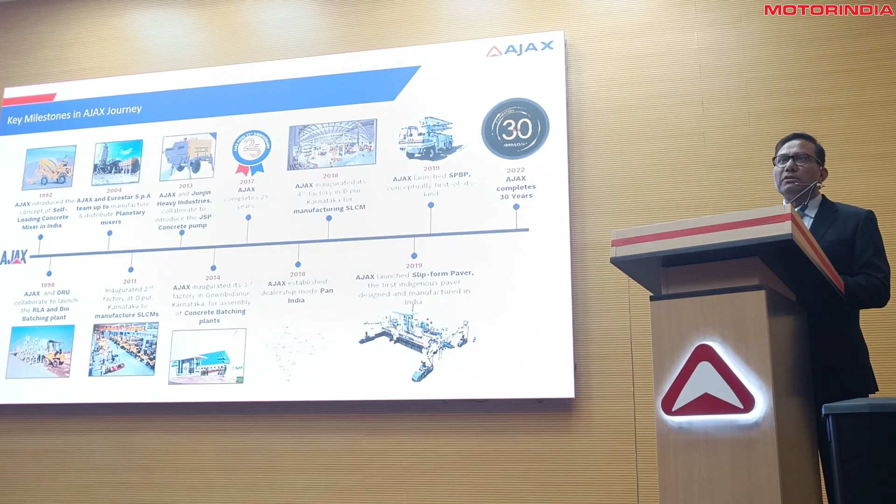Many of you may have known AJAX Engineering, but for those who don't, AJAX Engineering was started in the year 1992, and since then it's been 3 decades and more for us in this business. Over this period, we've become a comprehensive 360-degree concrete equipment company, which provides not just products but solutions to the construction industry.

We've reached this position through a journey that is deeply rooted in product development, design and engineering, innovation, quality and reliability of our products, and the strength of our distribution channel, which ensures that customers get the product wherever and whenever they need it, including the after-sales support that is so key to the success in this business.

Friends, we have played a very pivotal role in establishing ourselves at the forefront of developing infrastructure in India.

We often hear 'make in India.' But having said that, where will an Indian company go? It is obviously going to make in India. But little pun on the make in India, we have been making India for the last 30 plus years.

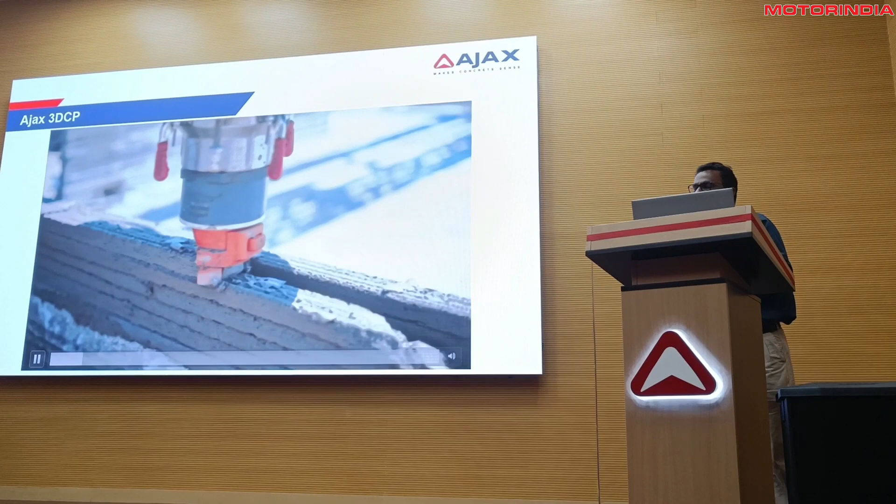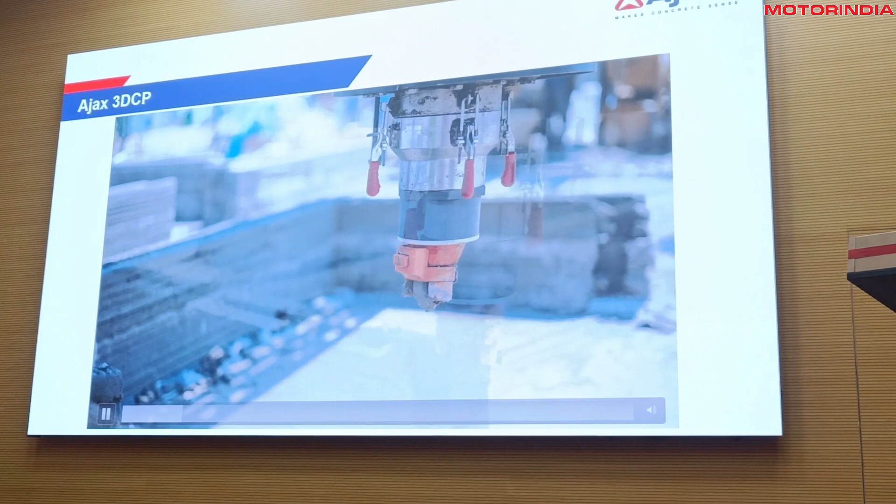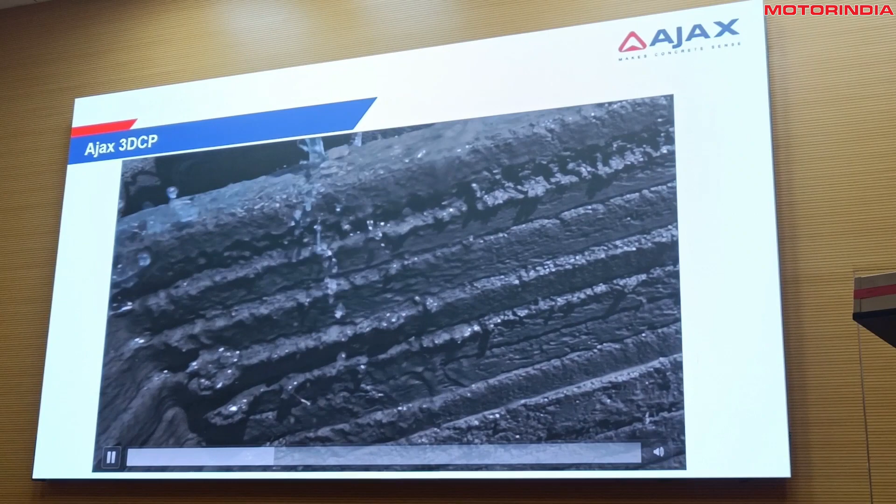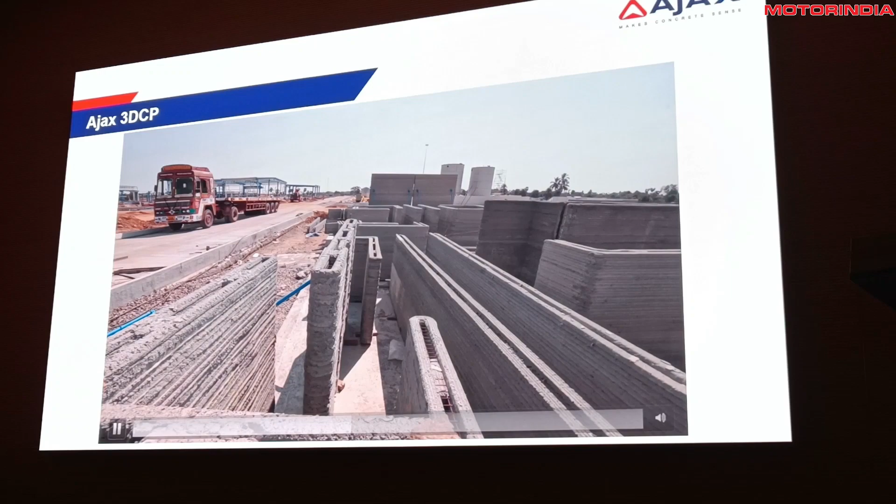First at the Chennai site, this was the first site. The machine was built and then immediately it was transported to that site, and we have done a great marvelous job there. So you can see that. Which are built so that a very big size building can be done. You can see the reinforcements. Some of the parts are 9 meters in length and 3 meters in height.

This one is the BRO site.

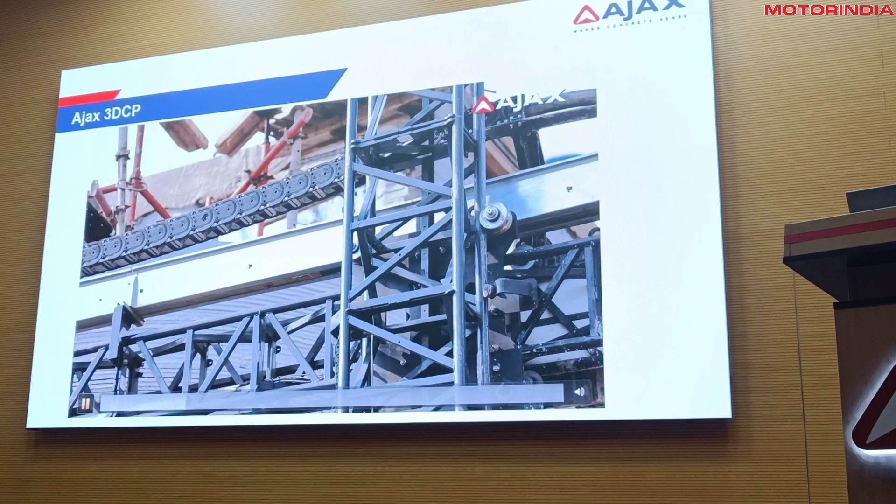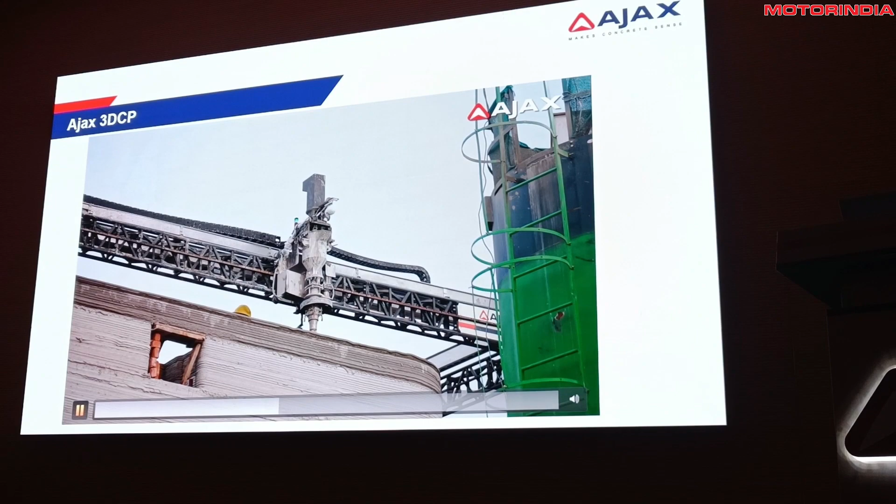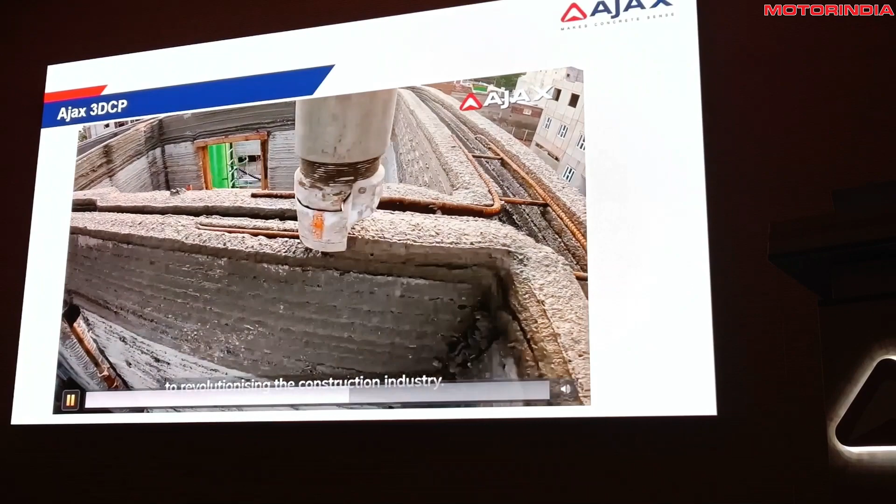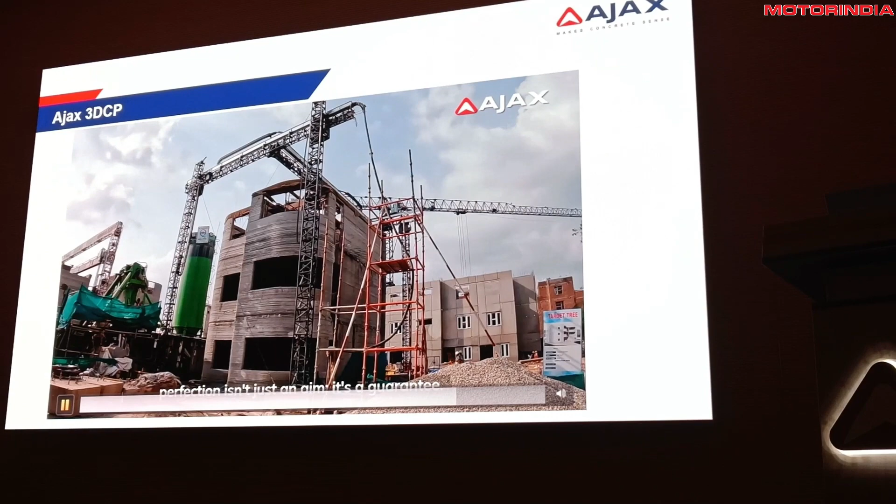In a world where innovation drives progress, AJAX stands at the forefront, reshaping the way we build. Crafting the impossible from the ground up with unparalleled precision. Meet the future, AJAX 3D construction printer. Crafting diverse structures layer by layer. Turning digital designs into tangible masterpieces. At AJAX, we've always been at the forefront of innovation. The 3D construction printer is a testament to our commitment to revolutionizing the construction industry. It's not just about building faster, but smarter, more sustainably, and with unparalleled precision. Every layer printed is a step towards a more efficient construction future. With the AJAX 3D construction printer, perfection isn't just an aim, it's a guarantee. AJAX 3D construction printer, building tomorrow today.

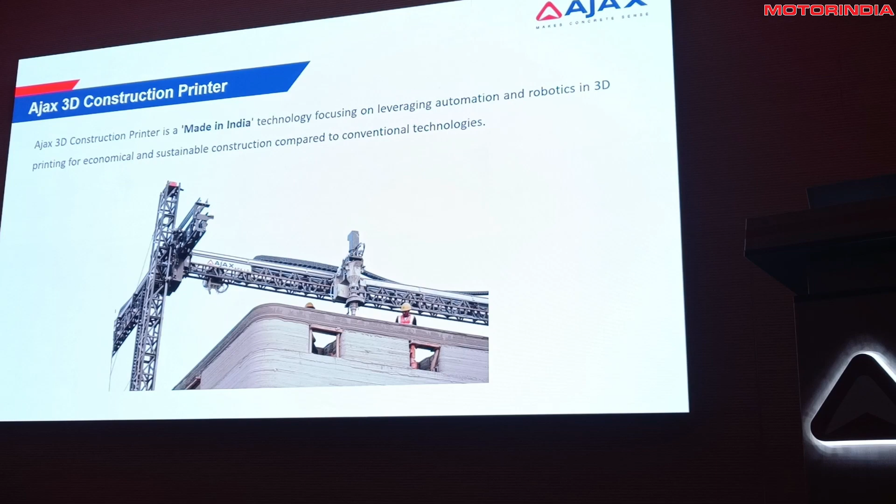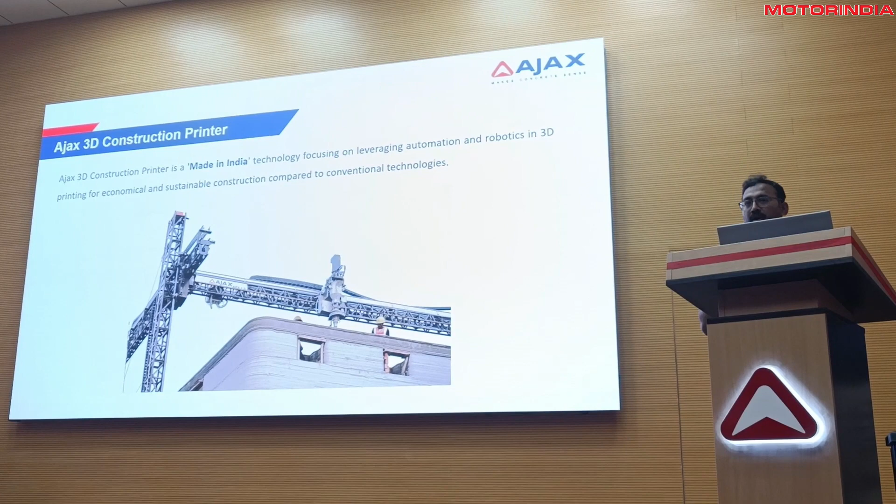So my colleague Kishore and me, both of us, will try to talk about our printer. Yeah Kishore, come. So this construction printer is made in India, meaning it's completely designed here, manufactured, and assembled. So everything has been done totally in India.

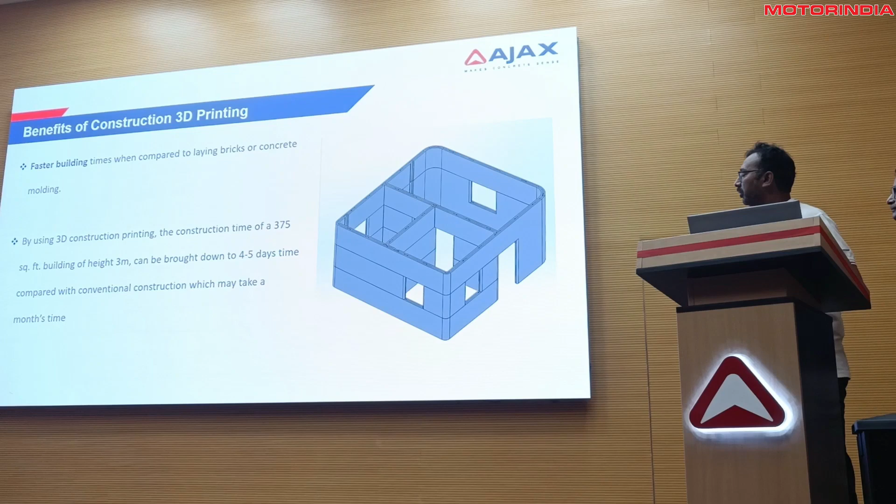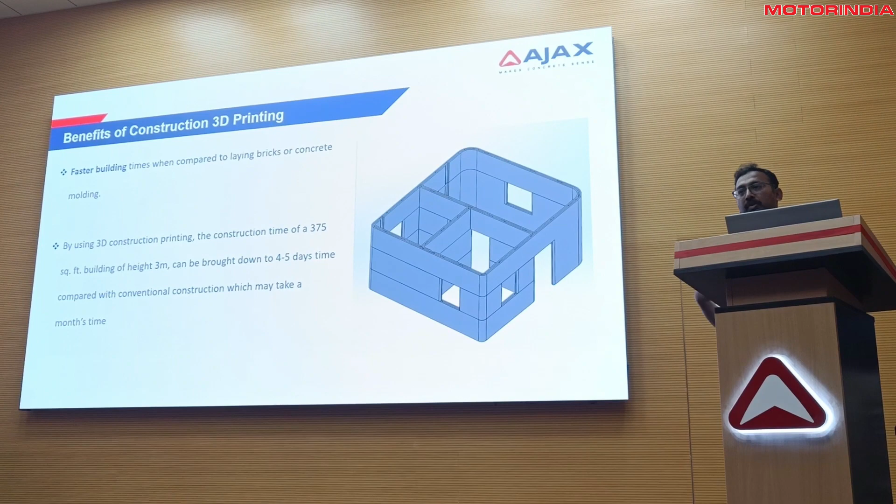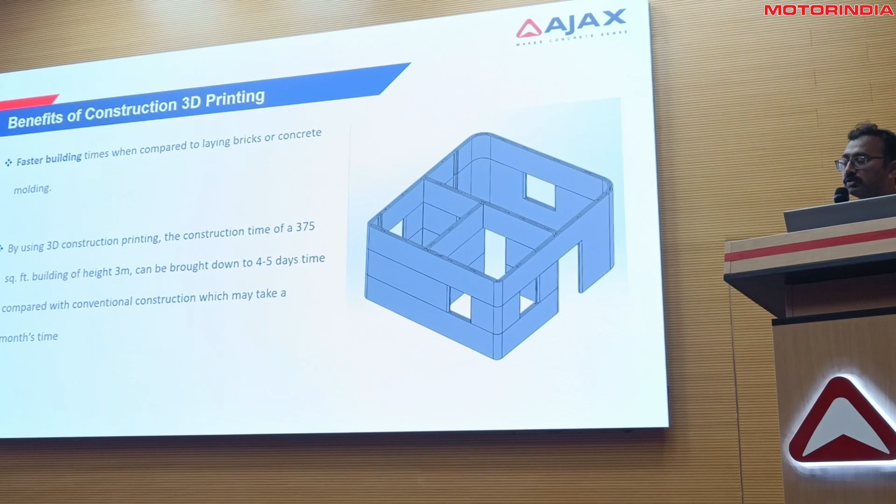So what are the benefits of construction 3D printing? We can build faster when compared with laying of bricks or any concrete molding or Mivan technology. So the rate of building is very faster, and you can, for example, build a 3-meter height building in 4-5 days. So for example, if you consider a 375 square foot building of height 3 meters, it can generally be completed in 4 to 5 days. When you take conventional construction, it takes around a month's time for completely building a 3-meter high building.

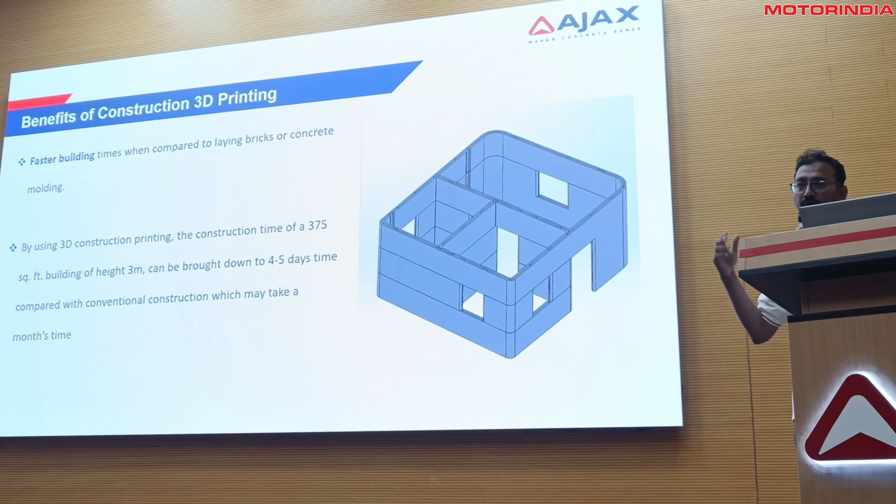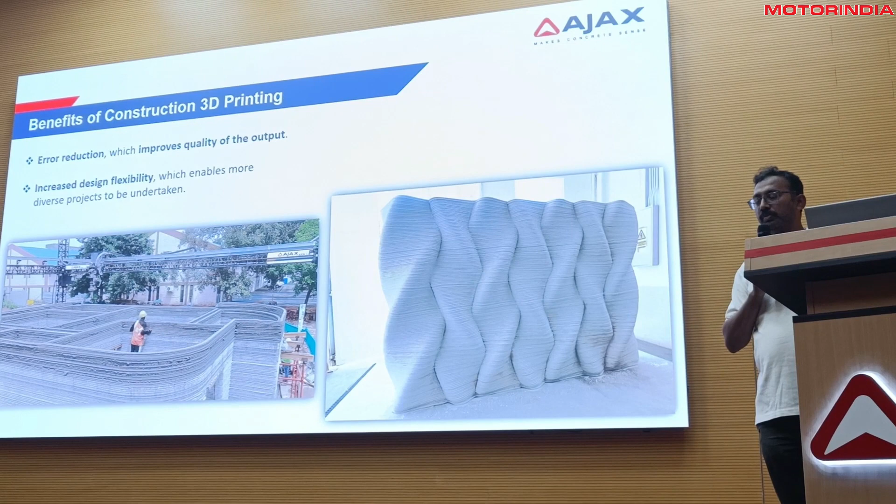And in this case, error reduction is very high because it's a completely programmed path. Once it's fed into the system, it simply has to repeat the path and it will be laying the layers. So the rate of error is very less and it improves the quality of the output.

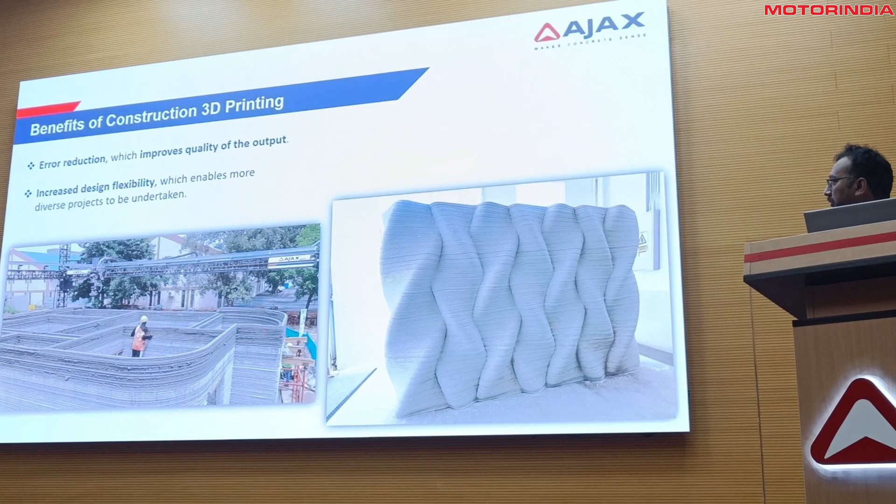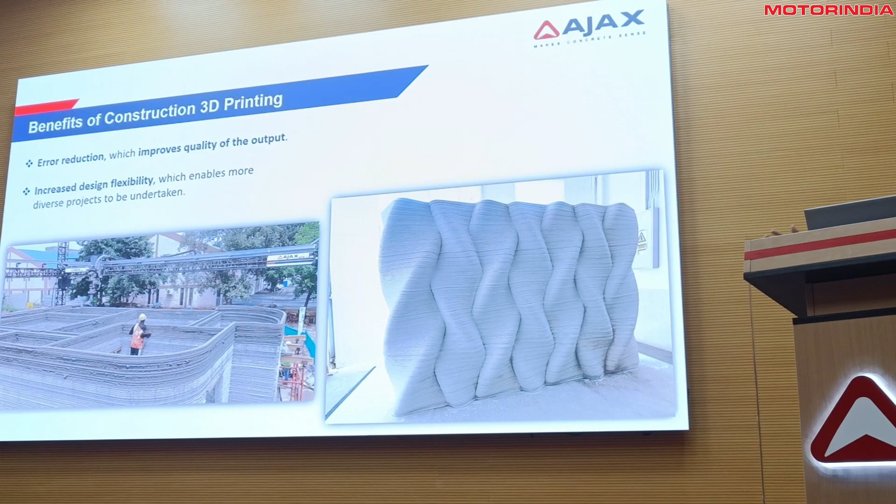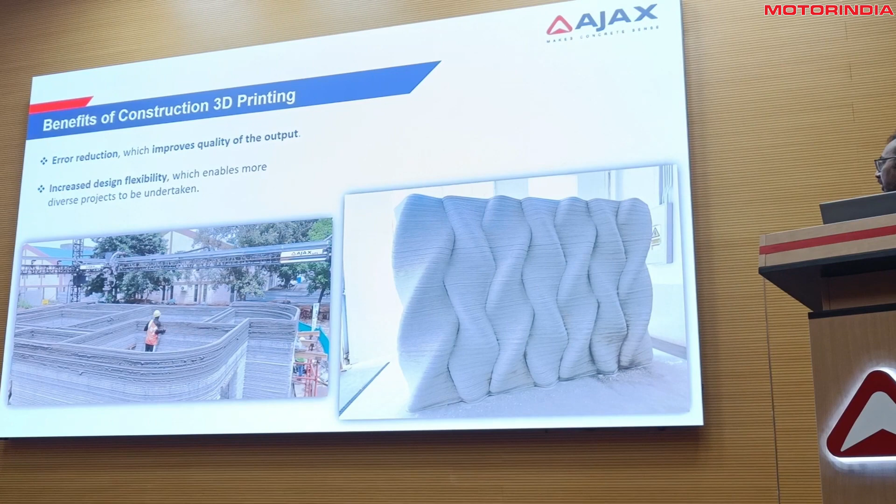And the next important point is that it has increased design flexibility. So in the bottom picture, you can see the curves. We can add curves or any shapes or any complex things which can be printed. This is also an example of how complex structures can be printed. So if you have increased design flexibility, then we can work on more diverse projects with very complex shapes, which would not be possible in conventional construction.

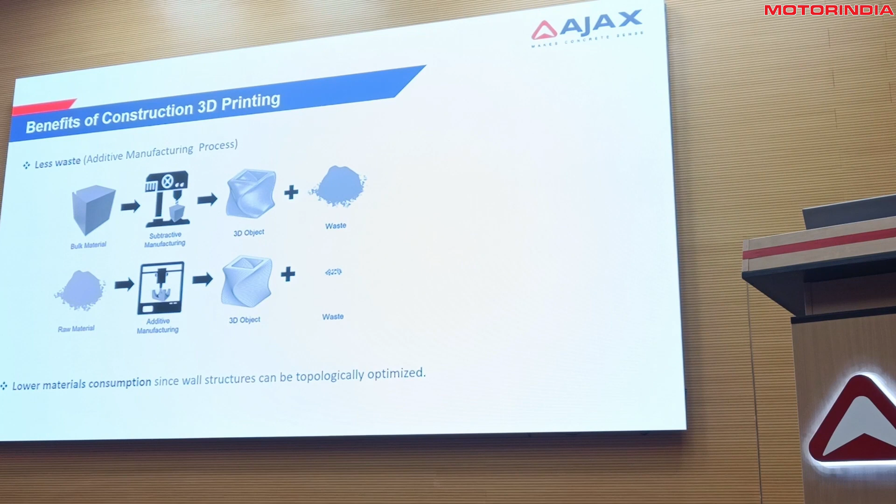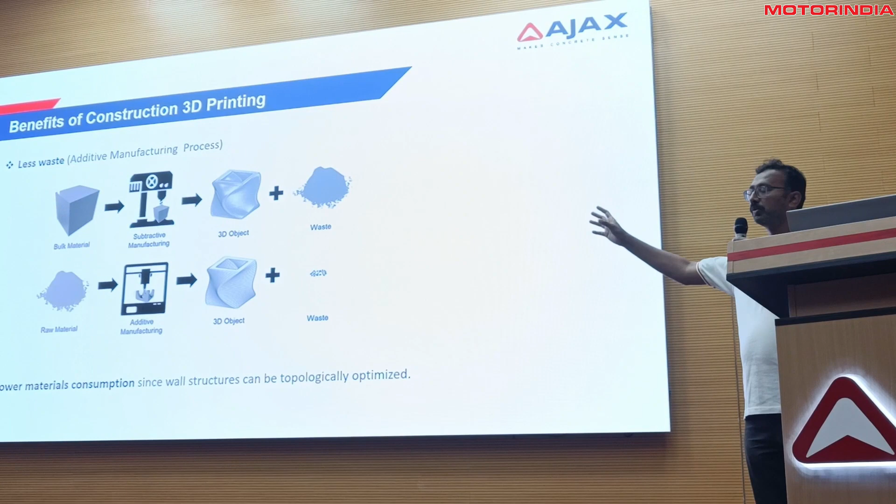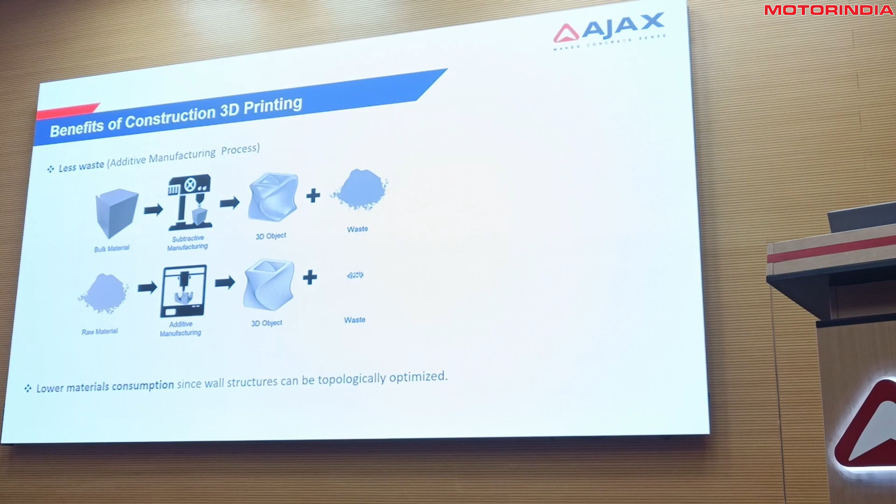Another important feature is less wastage. Why is there less wastage? Because if you take any regular construction, for example, in this picture you can see a solid. So for converting the solid into the required state, we have to remove a lot of material, so there will be a lot of wastage. In case of this construction printing, what happens is that we take the raw material and we form it to the required shape, so there is very little wastage of material.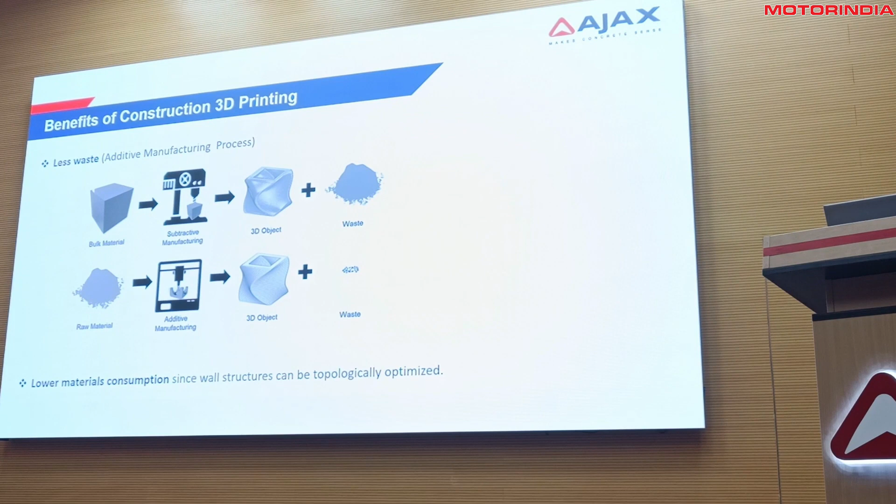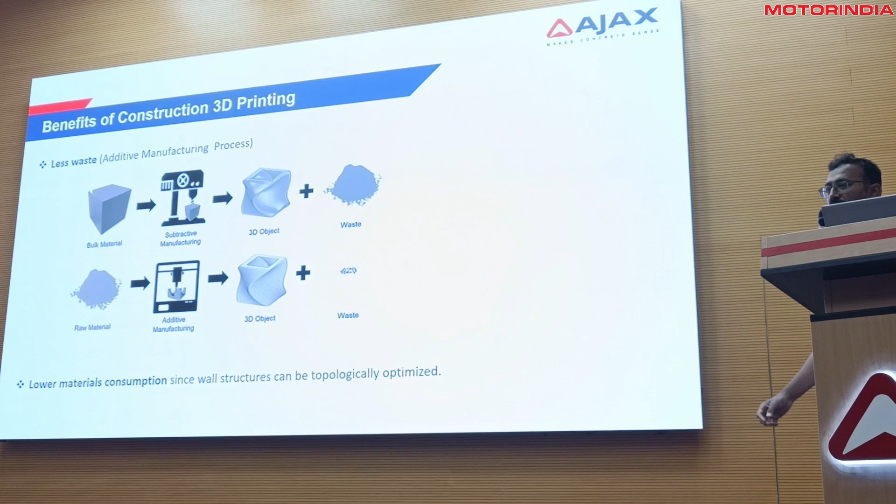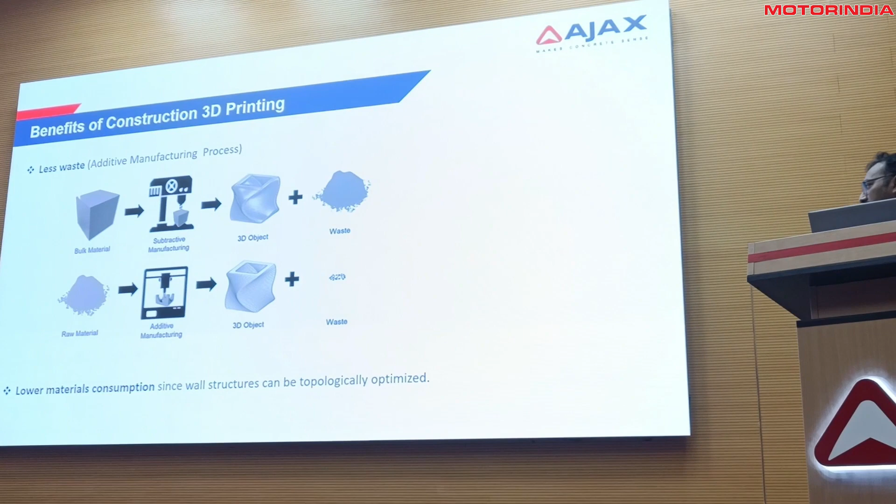Another benefit is low material consumption, since wall structures can be optimized. For example, as per the design structure, if a required thickness is needed that cannot be achieved with conventional brickwork, that is possible in 3D printing, where you can form it as per the required strength. There is complete flexibility, which results in lower material consumption.

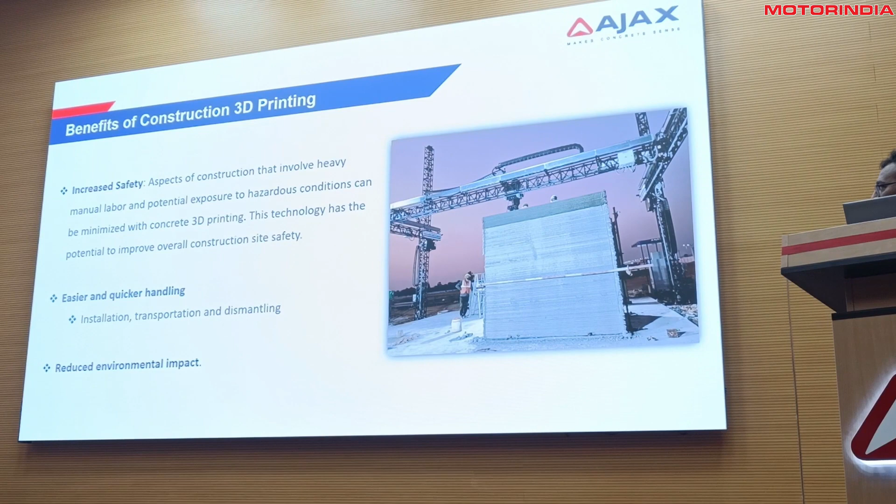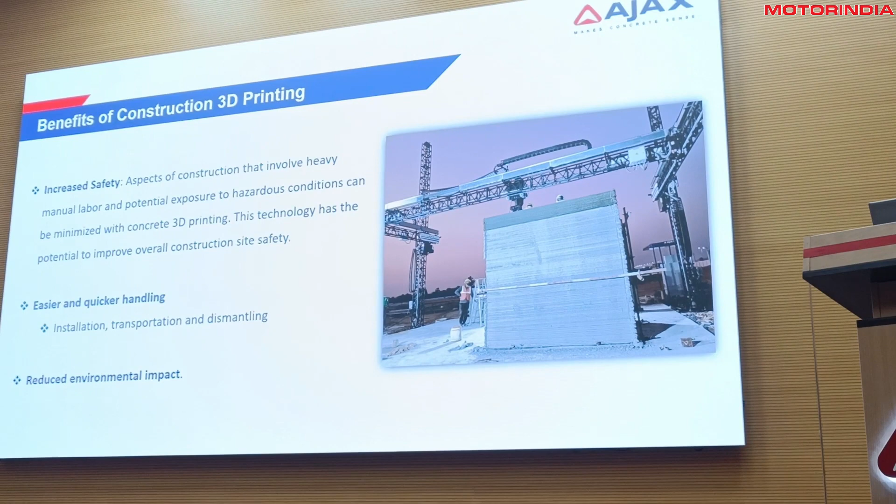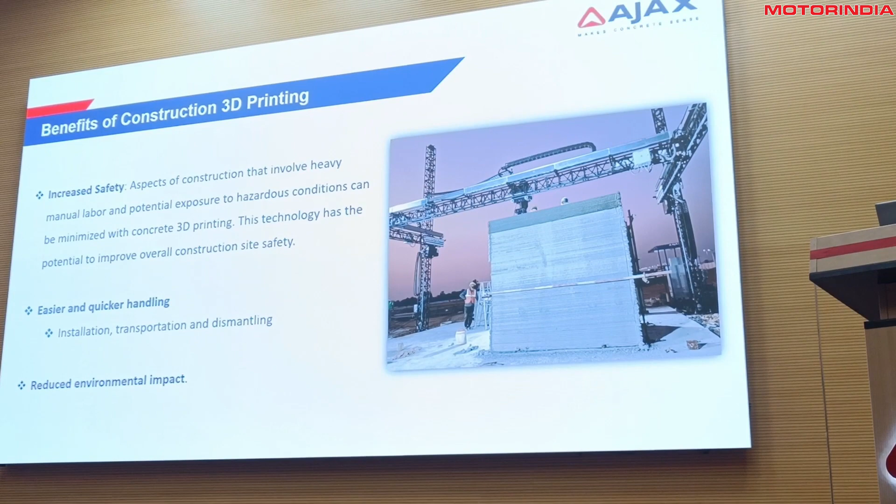Another important point is increased safety. At any construction site, there will be a lot of people manually carrying materials, and when working at heights, they still have to take materials up for pouring concrete. In this case, there is complete concrete routing - a pump directly pumps to the top of the hopper, and the nozzle just presses out the concrete. So there is increased safety.

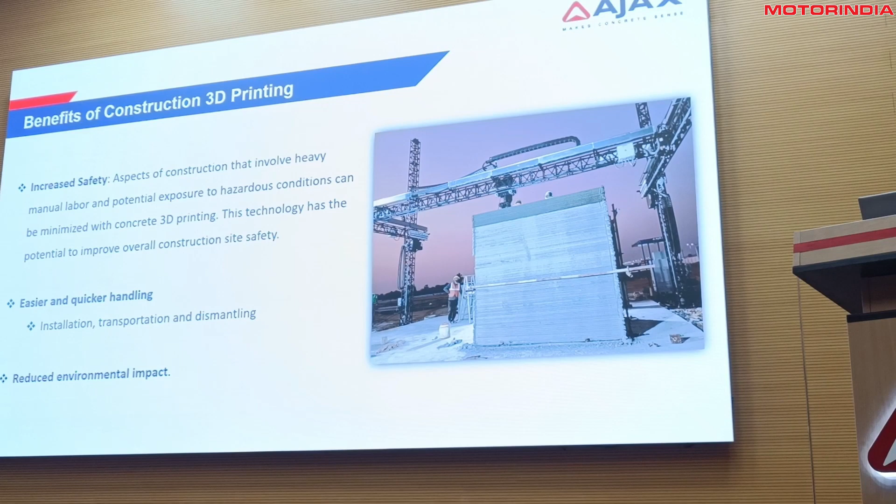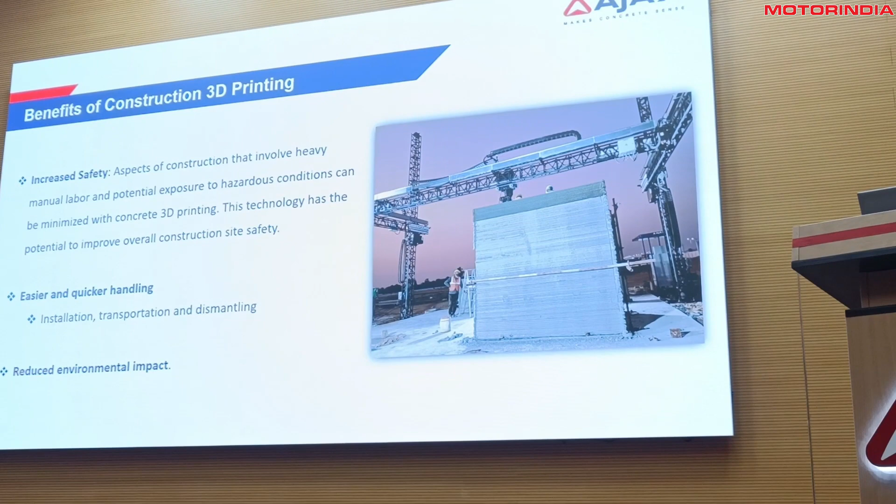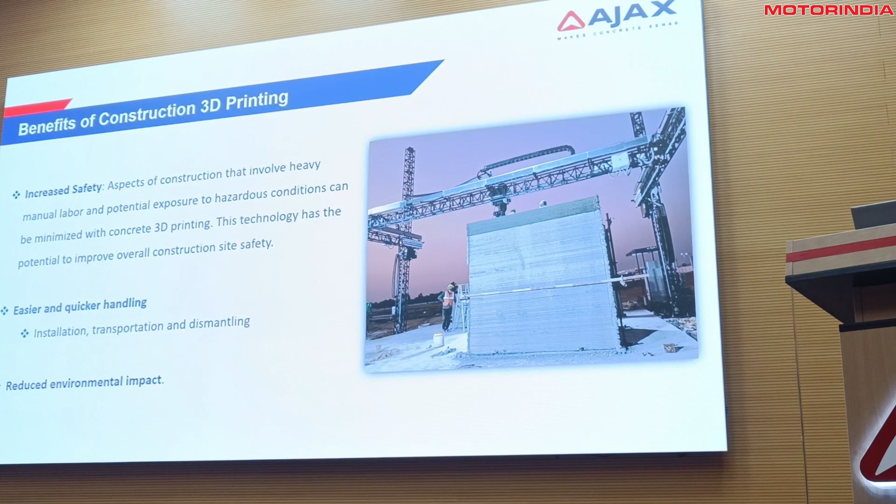And you can work in the day and night, even at night. At the BRO site, most of the project was done at night, and it was done with ease because the operator stands down while the machine continuously builds. Even at the third floor or second floor, the construction is going on, but the operator stays below, so there's no problem at all. Most projects, even in Chennai, were done at night, and at night in Chennai it's much easier because the weather is cooler. Comparatively, with conventional projects it's very, very difficult to work at night.

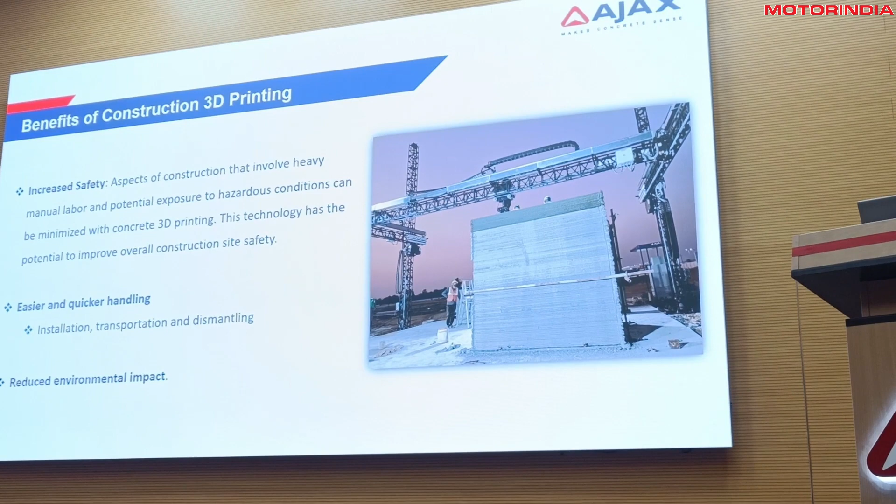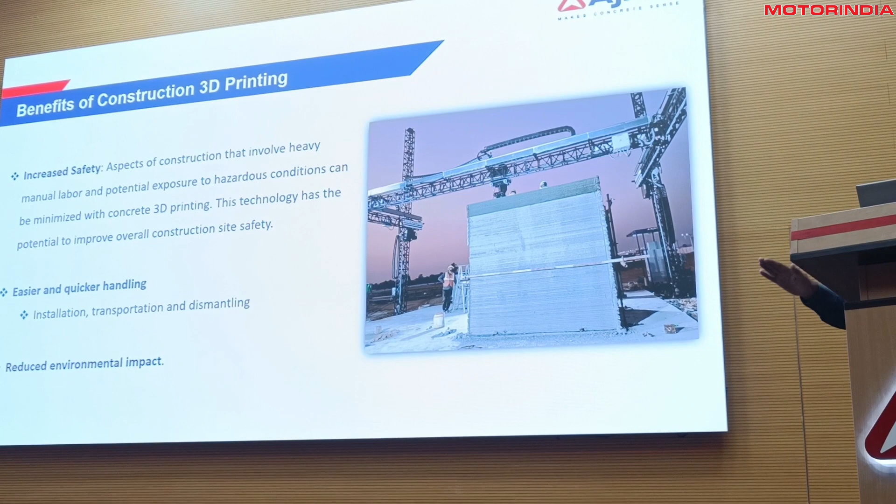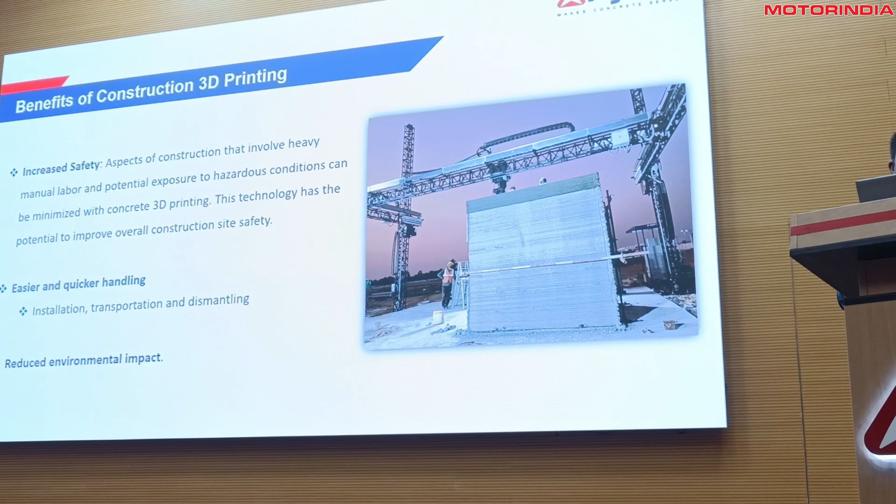It's also easier to install. It takes only 1 day to install this machine. Once you take it to the site, transportation itself is easy - you just bring the trailer, and with a regular crane we can place the machine on the trailer. It can be transported in 2 trailers - the full, large-size machine can be transported in just 2 trailers. To erect it, we only need 1 day, and the next day you plug it in and start using the machine. To dismantle is much easier - it takes only 4 hours.

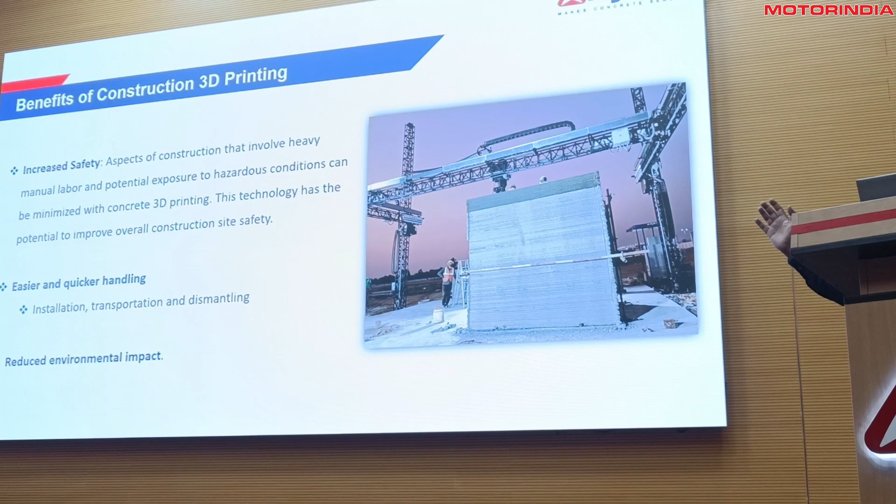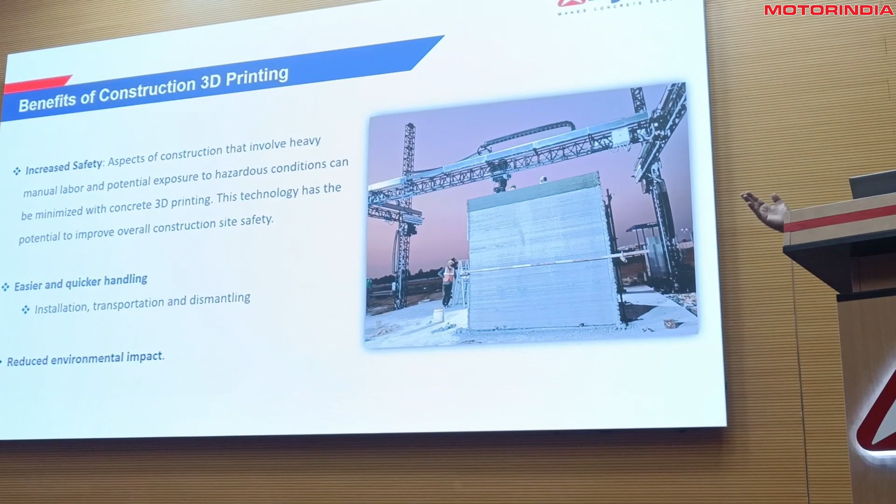If you look at the overall impact of this machine, it has nothing other than electric motors - only electric power, and that too minimal, within 30 kVA the whole machine can operate. There's no generator, no diesel engine, no other equipment needed. So it's an environmentally friendly machine, with no dust and none of the mess that comes with carrying bricks for brickwork.

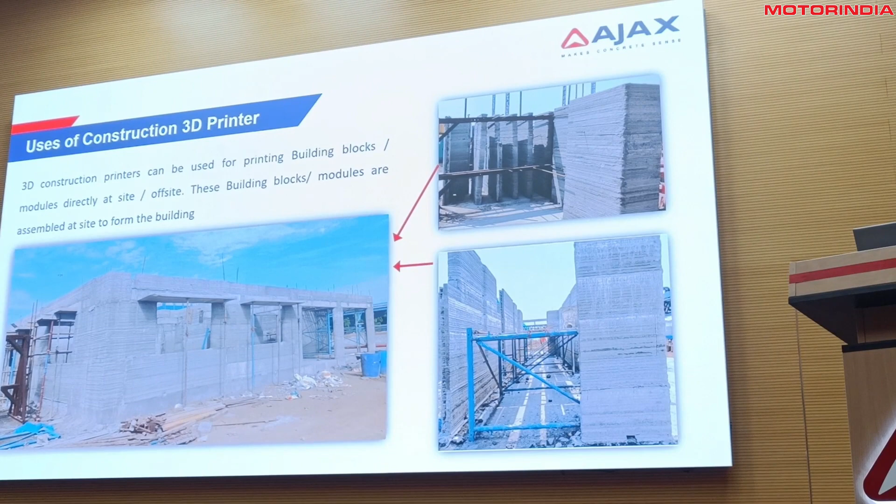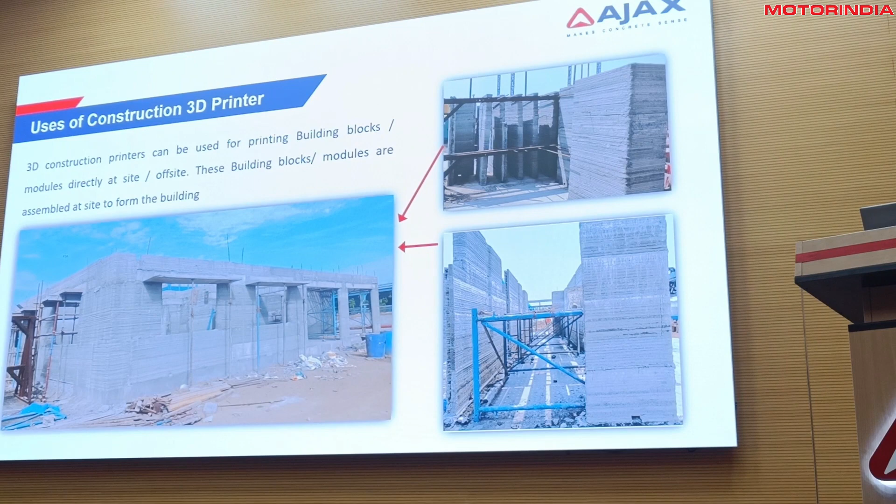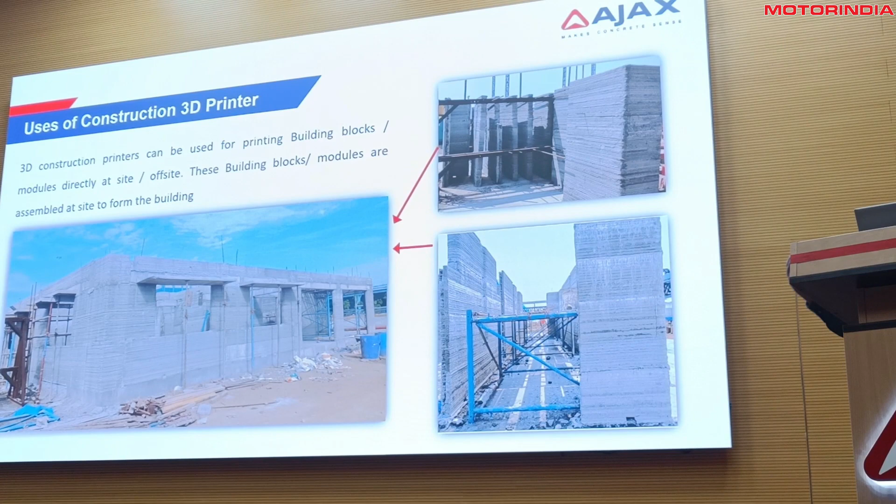Here we've shown the precast parts - large size parts were built because the size of the building was much bigger than the machine size. So we said yes, it can be done with precast parts, large size parts. Some of the parts were 9 meters long, 3 meters high. They were built adjacent to that, and the productivity was so good that by the time the next part was ready, the first floor, one side of the building was already ready, and then the next, completing the building. The building is ready now and will be used in a short period of time.

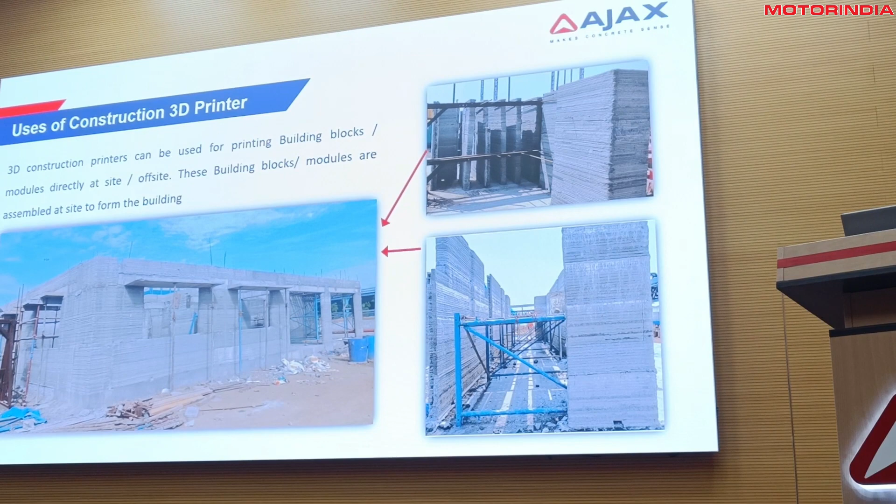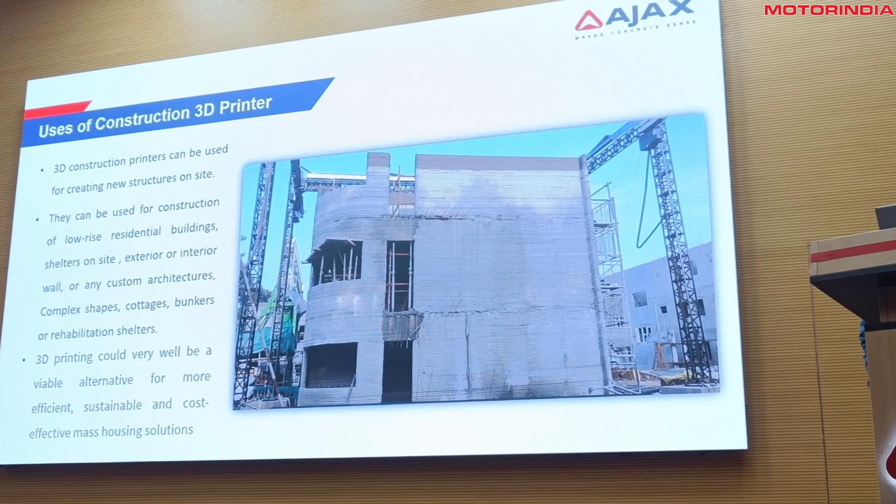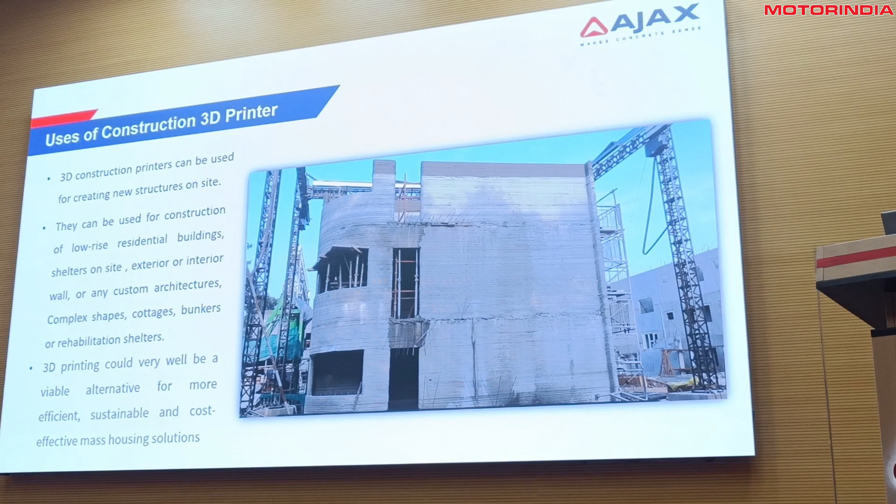This one is the G+2 at the Chandigarh site, and we could complete close to 1.5 to 2 meters of such a large building in a single day. It was so surprising that we wanted to discuss it with the customer, and by the time we did, we saw that the building was ready.

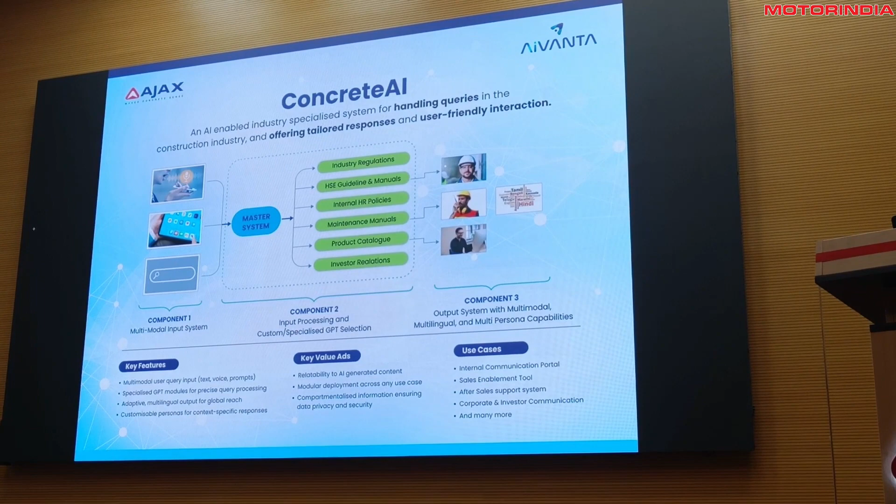So what you saw here is a complete concept of what we are building as Concrete AI. Concrete AI at the heart is essentially an enterprise intelligence system designed to handle multiple modal queries across the entire concrete industry.

Essentially, at its heart is something you see right in the middle, which is specialized trained GPT models, which can be deeply trained and can keep continuously learning a specific area of expertise. This makes sure that whatever answers, whatever queries we generate using this system, is not a generic response that you probably get from ChatGPT. It is a specialized, trained, and custom-built GPT, which can handle queries across a range of subjects.

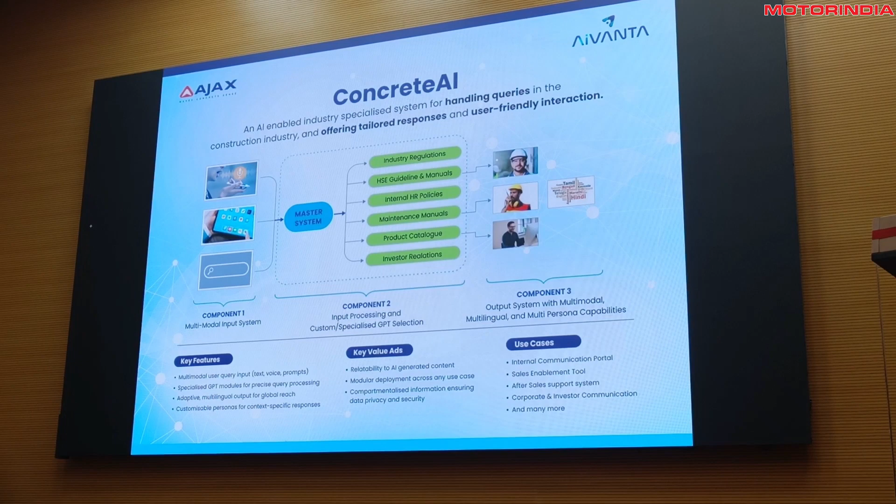The way to look at this is each of these green segments that you see are specialized, trained, custom GPTs, which are on steroids. That's the heart of this intelligence system.

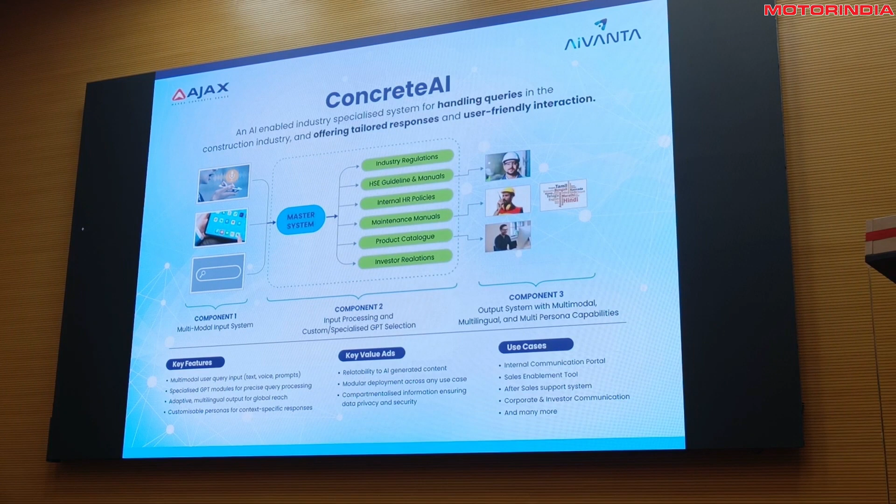Once we build the intelligence system, the second feature we want to highlight is that this is a multimodal system, which means you can not only respond or ask questions using a chat prompt, it is a touch-enabled iPad app, as well as a voice-enabled feature.

Once you ask a specific question, it does not go and fetch a generic answer. It starts to look at a very specific answer, focusing on one specific category.

Once the response is fetched, the response is both multimodal as well as multilingual. What this means is you can get the response as a video, it could be an audio format, or it could be a chat format.

Not only this, you can have any number of languages in which this system can respond to you, which makes it extremely adaptive, especially when it comes to working with both regional as well as global customers and dealers. It makes it extremely adaptive, both in terms of how it learns through your queries, as well as how it throws out the information, rightly suited to the kind of language and format applicable at that point in time.

What we have also tried to show here is a broader purview of how this Concrete AI can completely revolutionize the way the entire value chain of the concrete industry engages internally as well as externally with their dealers, business network, clients, and potential clients across multiple use cases.

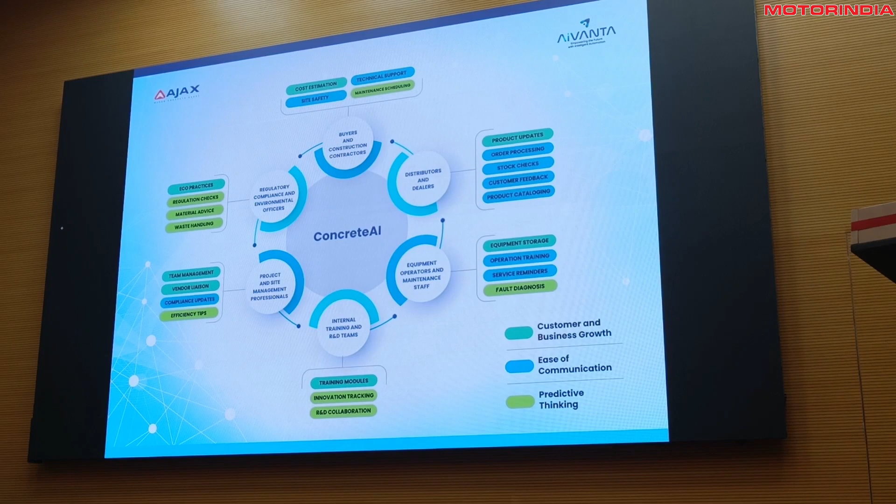So this is essentially limited to our imagination how we want to limit the use of this EIS. Eventually, as we keep learning, as we keep evolving, which AJAX has shown completely geared for, we can keep building multiple use cases. We can keep adding modules into this. It's a completely modular system which does not need to interfere with any existing IT infrastructure of AJAX.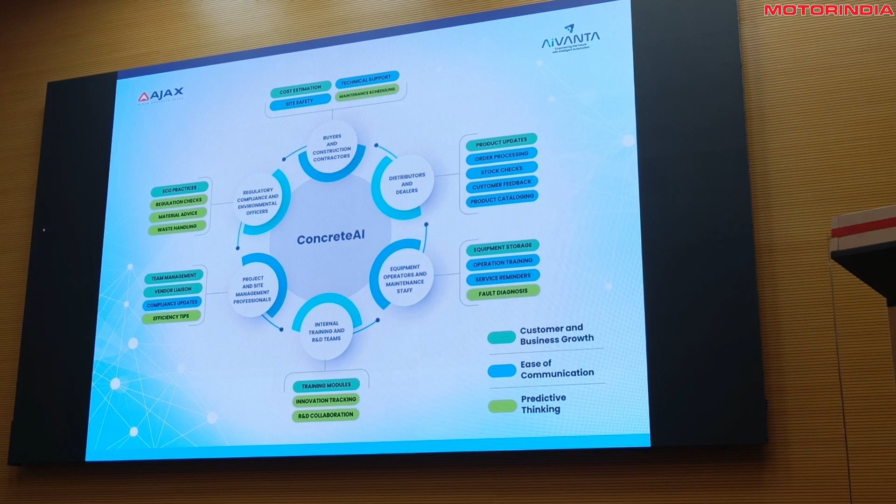So what we have kind of created here is one interface which shows you the multimodal functionality of Concrete AI. You can respond to or get the responses in video format, there is text format, as well as an audio format based response. So I'll just showcase one of these videos.

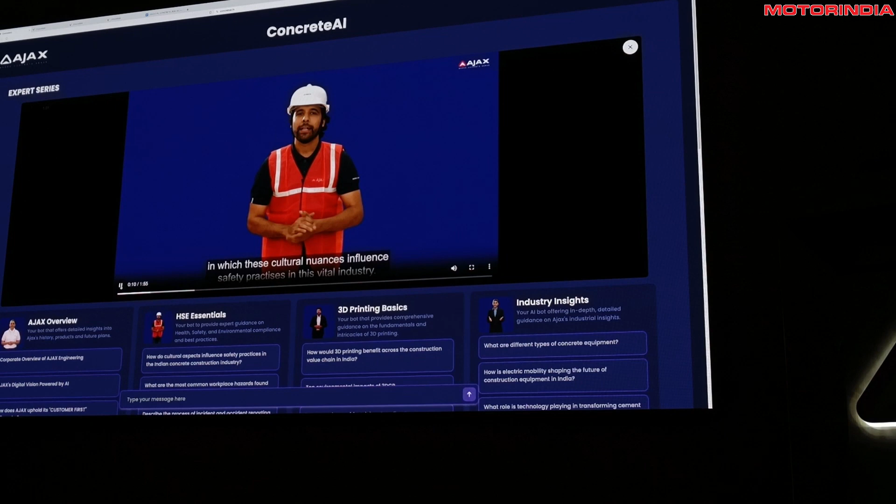Cultural aspects play a significant role in determining how safety protocols are perceived and implemented on the ground. Let's delve into some of the ways in which these cultural nuances influence safety practices in this vital industry.

Go to one more video. Concrete is the backbone of modern infrastructure. Its application demands precision and efficiency. In this video, we will delve into the various types of concrete equipment, each designed to meet specific project needs.

So all the videos that you see here are not real shoots. These are all AI generated content. This is 100% AI generated avatar-led videos. What this essentially means is it is very, very quick in terms of scaling its capability of handling different responses and handling different types of expertise.

AJAX offers a comprehensive support and training program for new users of Concrete AI, designed to facilitate a seamless onboarding experience.

So this is being generated right here. It's the live generation of AI content. If we change the functionalities to probably a different kind of voice, maybe a different language, it immediately changes to that language. So it becomes extremely adaptive.